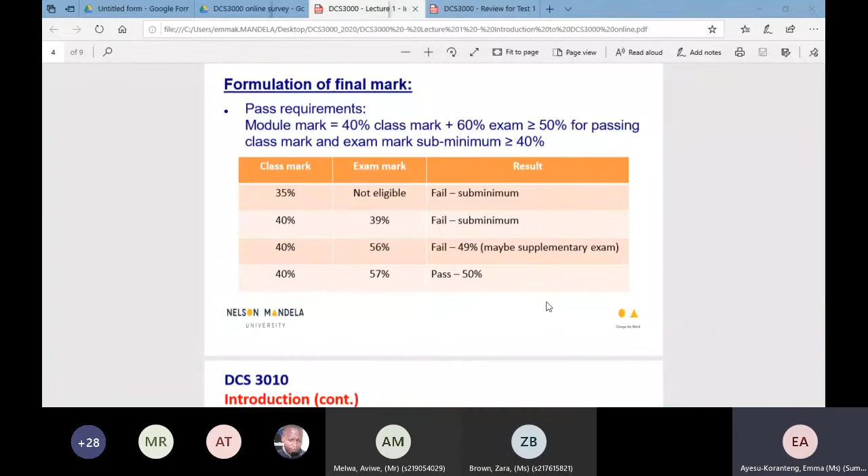Okay, great, awesome. So basically, if you're looking at the mark formulation, it's the same, nothing has changed. You need your 40% to get into the exam and so on and so forth. It's very much the same thing.

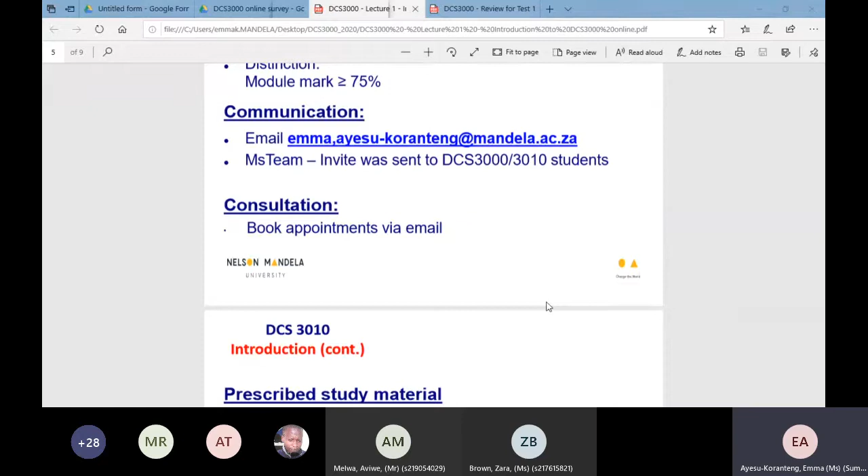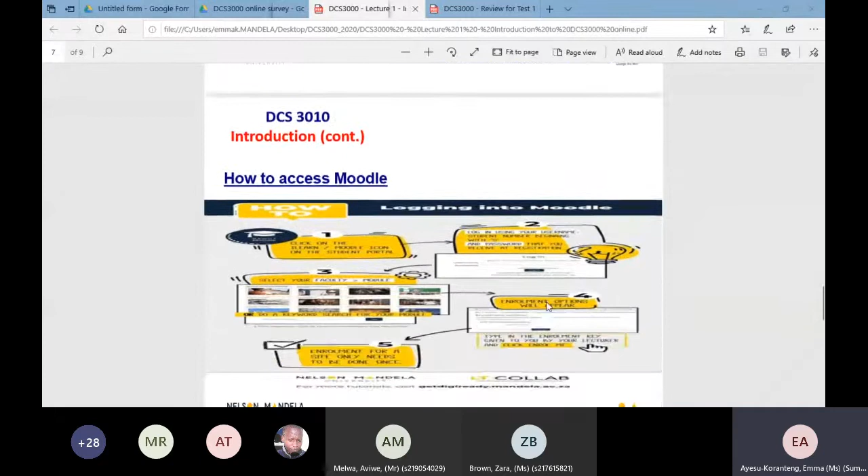You know the basic textbooks that we have, it's nothing for us to worry about, and by now you all know how to use Moodle. So basically, if we look at what we've covered thus far, we've done chapter 1, 2, 3, 4, 5, 6, 7, and 8.

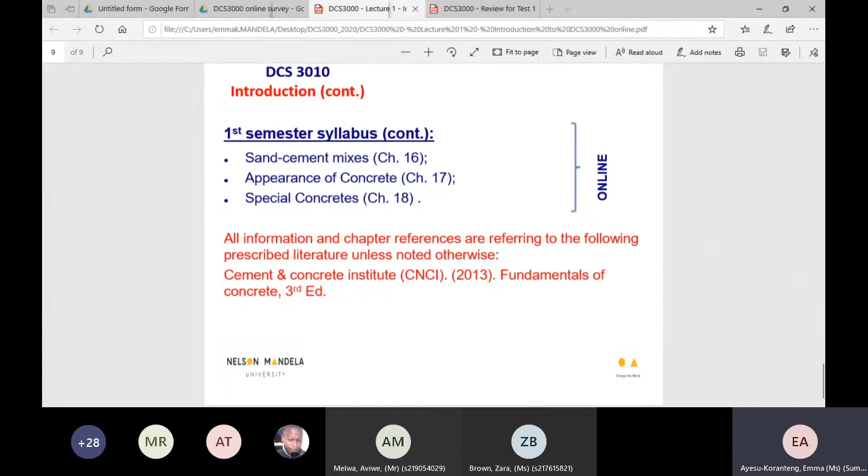Now, I do know, I mean, we've had a couple of weeks sitting at home. You were supposed to be going over your work. But as a student myself, I also know that I never do. So when I was studying and I had to do work on my own, or we were expected to read, I never did. So I'm assuming that most of you did not go over the work we did, and I hope I'm wrong.

But nonetheless, I just want us to review what we did before the lockdown. And also, it's vitally important, this is literally a summary of chapter 1 to 8. I know I received an email from a student that told me he left his textbook on campus or at the res or something. So that's why I put this together, to almost summarize chapter 1 to 8, to give you an idea of the most important points within those chapters that you're supposed to focus on. Even though this is not cast in stone, it does not absolve you, it doesn't stop you, it's not supposed to be a substitute for reading the textbook.

So you're still supposed to read the textbook irrespective, but this is just a summary of each chapter. Look at chapter 1. Chapter 1 is very much the basics, what is concrete. I think everybody is aware of that. We know that it's a mixture of cement, aggregates and the likes. And then of course, why concrete is used so much. So as we get along, these are the outcomes, these are the things you're supposed to know per chapter.

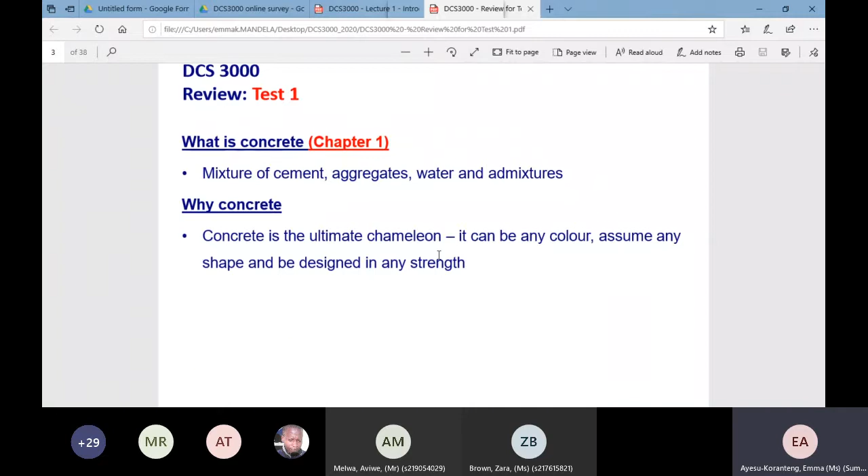All right, so if you have forgotten, or you don't remember, or you just want to recap, you can take your book and just highlight or make a note as we get along with this particular section. Okay, so that in a nutshell is actually chapter 1 in itself. It's very simple, understanding what concrete is and then why concrete is used extensively.

However, when you look at the reason why concrete is used extensively in your textbook, there are various reasons, but you don't necessarily have to know them all. But having a broad idea of the reason why concrete is one of the most used materials will suffice.

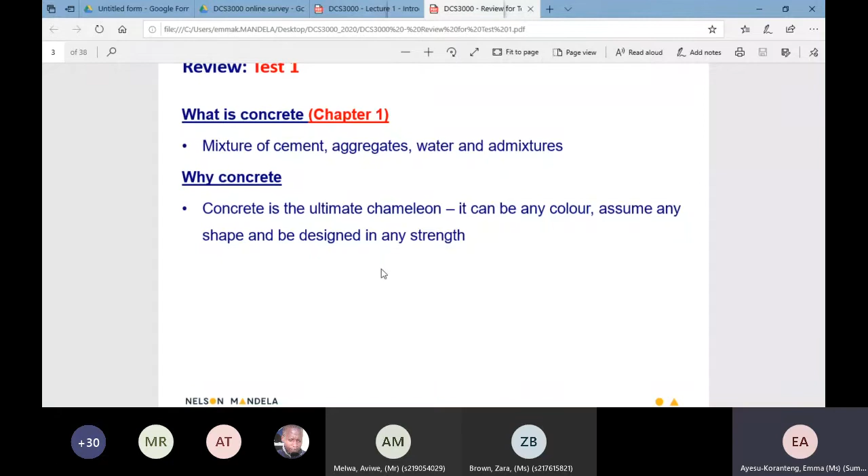So sometimes it's not everything that you need to memorize. Some of these things are things that you already know. Remember that normally in our lecture, I ask very practical questions, or I tend to get the guys that have worked on site, because concrete is very much site-based. It's like construction technology. Once you've seen it, once you've been on site, it's very easy to understand and it's very easy to apply. So it's very important that at all times, try and put yourself on site and try and see some of these things without necessarily having to spend so much time just memorizing things that you may not remember.

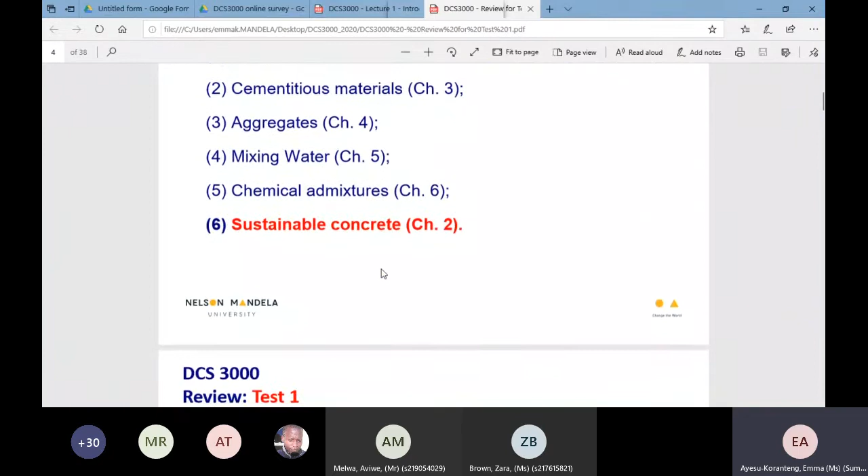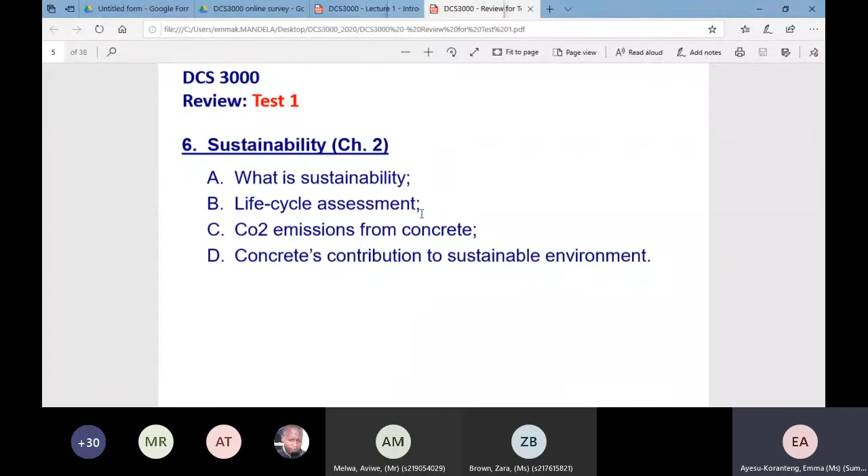All right, then the next chapter was chapter 2, which is sustainability, or the sustainability of concrete. Now, very important, when we deal with sustainability, you've got to be able to explain what sustainability is. I think I've highlighted that in the past as well. We're also supposed to look at the life cycle assessment, the carbon dioxide emissions of concrete, and then concrete's contribution to the environment, or to a sustainable environment.

We know that the carbon footprint of concrete, if you look at the entire world, is relatively very big. It's quite large. I mean, everywhere you go, it's just concrete structures and so on and so forth. But to what effect are all these concrete structures in relation to the environment?

So it's very important that even though concrete is used extensively, we've also got to understand that we've got to look at sustainability. We've got to give something back. Some of you have children. You've got to think about what are you going to leave for your children? What kind of world are you going to leave for your children?

I know everybody's talking about this coronavirus being a nightmare. Of course it is a nightmare, in the sense that there's no cure, there's no treatment, and so on. But I don't know if you've been watching the news. I don't even watch it because it's quite depressing.

But they've been actually showing that from the time of the lockdown until now, the difference in air quality, if you look at countries like India and China even, their air quality has improved so much. So there hasn't been much pollution. And I don't know, maybe sometimes I kind of think that this is Mother Nature trying to cure itself, or trying to get itself back because of all the misdeeds of human beings, or all our activities that is polluting the earth. So who knows?

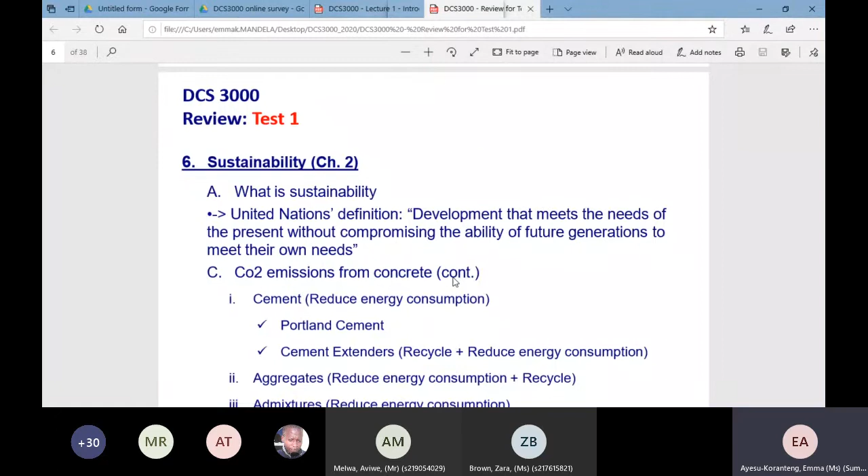But the construction industry is not exempted. We contribute significantly to global warming, significantly to pollution. And at a point, we've got to start thinking about what we're going to leave behind. Not for us—we are here now, look, 50, 60, 80 years if we're lucky, we'll still be around, God willing. But what happens to those that come after us?

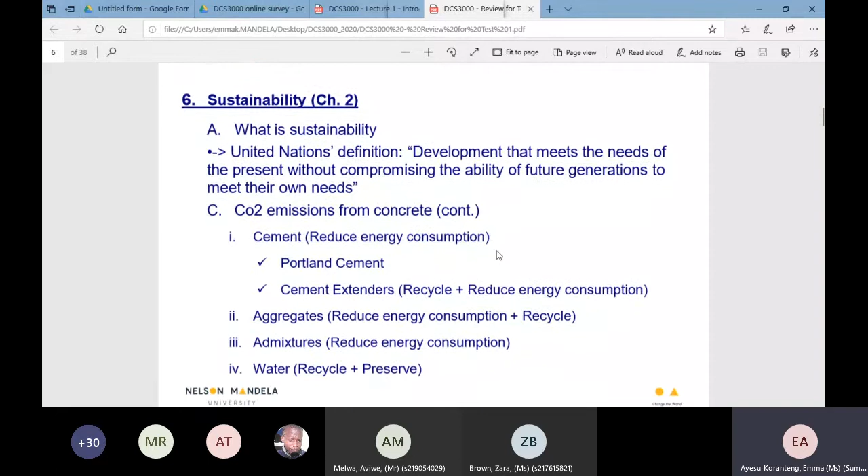So we've got to start thinking at least along that line. So when we look at sustainability, of course what you need to know is you need to be able to define it, in whatever definition there is. But of course we always look at the United Nations definition, which is fine. But whichever definition you decide to use, it's okay with you. It's not a problem, because the definitions will more or less be the same. The wordings may be slightly different.

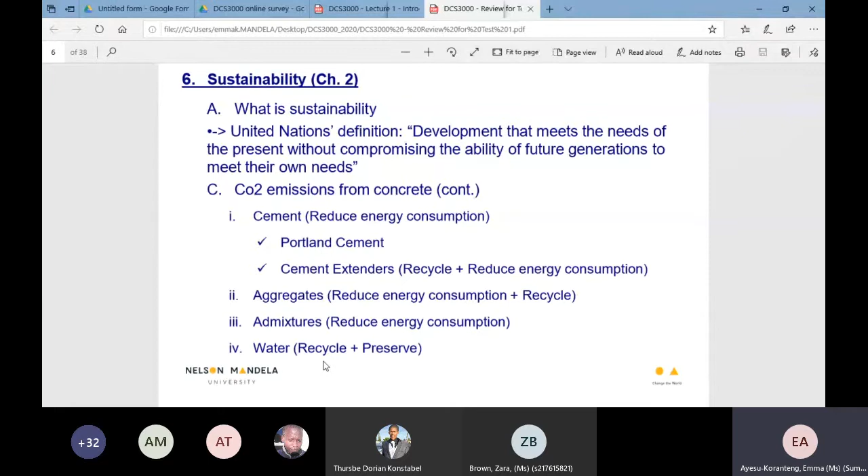And then admixtures, and then the last one is water. With water, you're all aware that we currently have a water crisis. We've got to survive, we need clean water to drink, but water for making concrete, if we don't have enough water to drink ourselves... remember that water for concrete should be the same quality as the water that you drink. If that's the case, then we've got to consider using recycled water, harvested water, etc., to have a positive impact on sustainability.

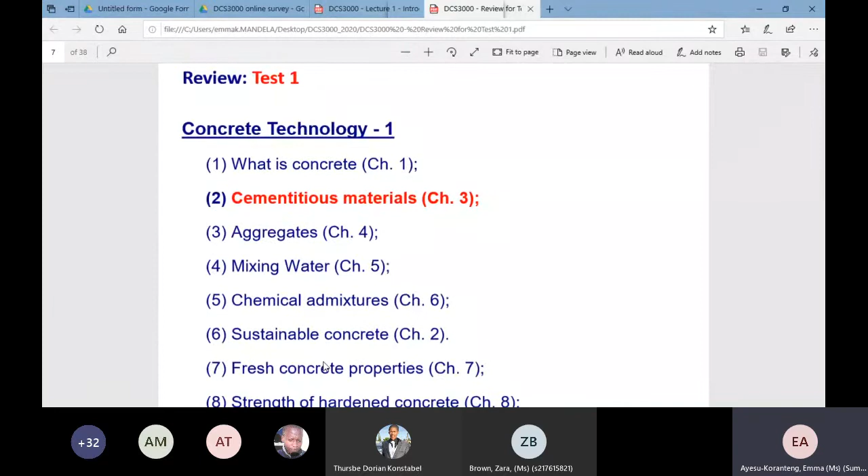Okay, let's proceed. So that covers chapter 2. We move over to chapter 3, which is cementitious materials.

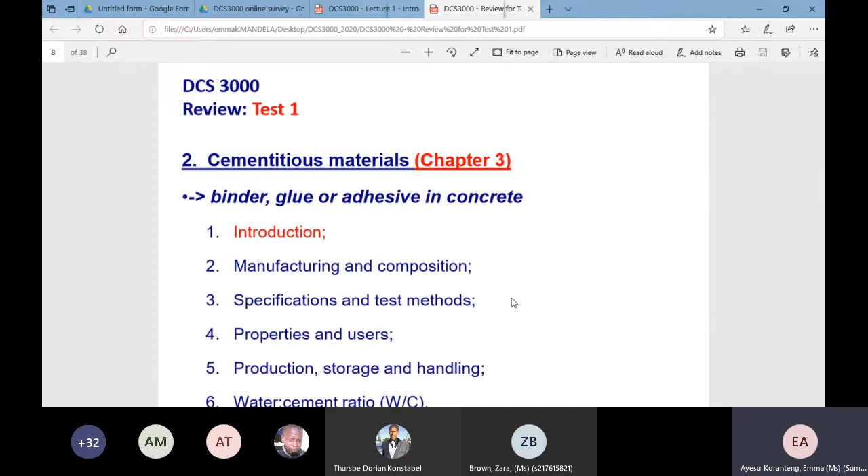Perfect. All right, so we're going to look at cementitious materials. You're all aware of cementitious materials - we're talking about Portland cement, we're talking about the cement extenders, the fly ashes, and all of that stuff.

We know that cementitious materials are the binding agent in all the ingredients. Without the cementitious materials, you have the various materials just as particles, just in a bowl or whatever. But with the cementitious material, it's the glue that binds them all together.

So imagine having sand, coarse aggregate, maybe an admixture, and even the cement itself. So you'd have all of these ingredients together, but they're not sticky, they don't stick together. Once you add the water, that's what kickstarts the hydration process, which makes that gluey, sticky paste.

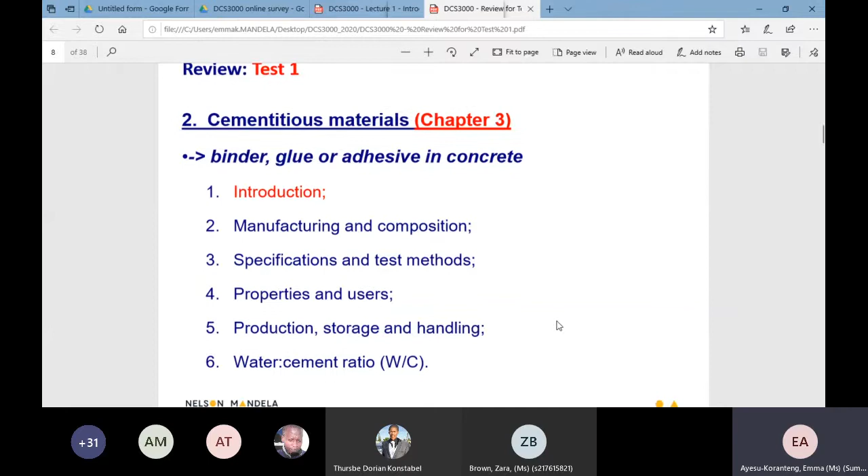Moving forward, we know that we have various cements - common cements, masonry cements, and cement extenders. Guys, you've got to be very careful that certain cements are used for certain things. So don't confuse this in a test.

I know that when it comes to multiple choice, sometimes it gets extremely confusing - you're all familiar with how Dr. Becker asks questions from his DCO first year. My multiple choice is structured like that, so it's very easy to get confused. But nonetheless, you need to be able to understand the specific cements and what they're used for.

You should also know just a few of them, not all of them - like we have the CEM I, CEM II, and so on up to V. We have masonry cements, and you need to have some sort of understanding with regards to the types of masonry cements. We know that some of them have admixture, cement extenders in them, and so on.

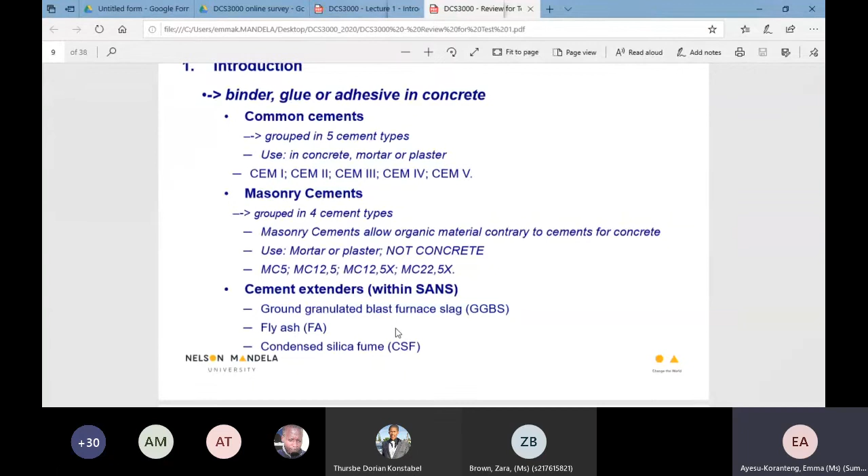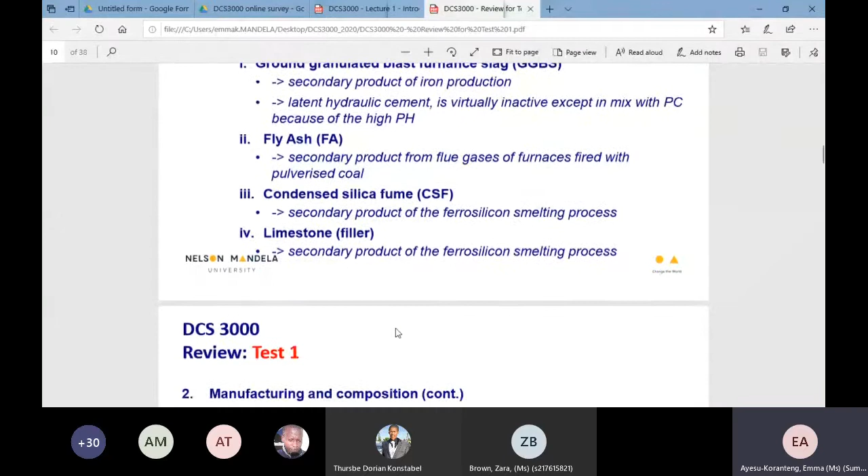And then of course having the extenders themselves, being able to differentiate between the GGBS, the fly ash, and the condensed silica fumes. I'm not going to go over all of this in detail - I've actually uploaded this document on Moodle for you. I just wanted to highlight what you need to know.

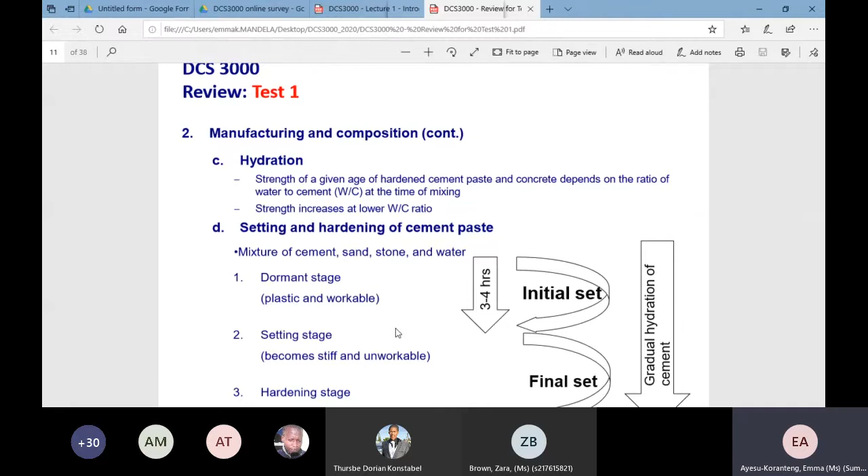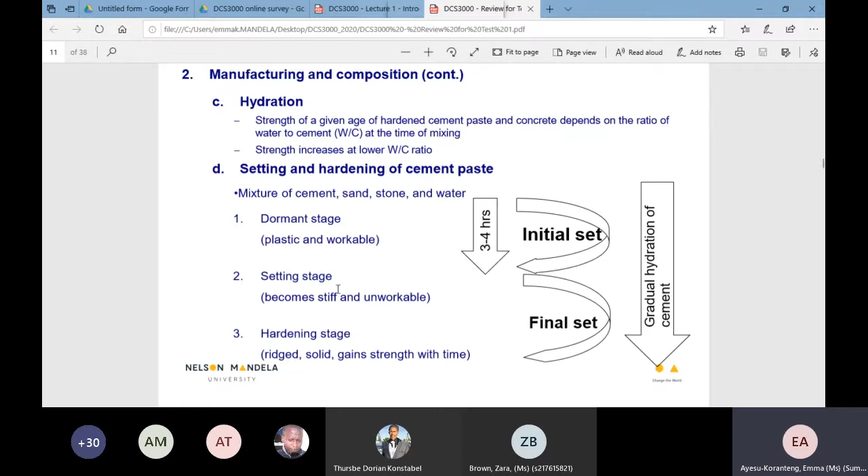So obviously hydration - understanding what that is, how concrete sets and how it hardens - this is something you all should know. Also being able to explain the dormant stage, the setting stage, and the hardening stage. Now, I'm not redoing the lecture, but I'm just giving you a brief overview of the various chapters that we've covered already. So all of this has been done previously - it's just a matter of touching base with what we've done.

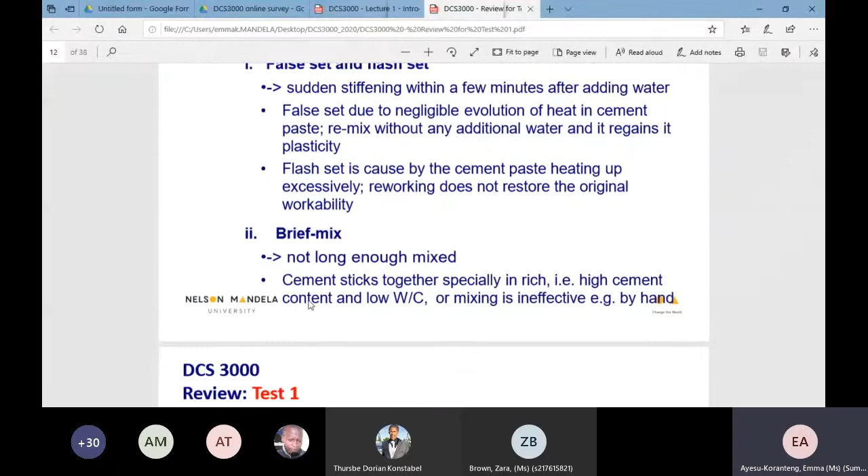Setting and hardening again - yes, please do note and don't forget the false set and the flash set, the brief mix, and very important, when you look at a false set and flash set and even a brief mix, you've got to be able to understand or explain or demonstrate whether, if you have a flash set or a false set, is there anything you can do about it? Can you improve it in any way?

That kind of thing. So having a broader understanding of these things is important.

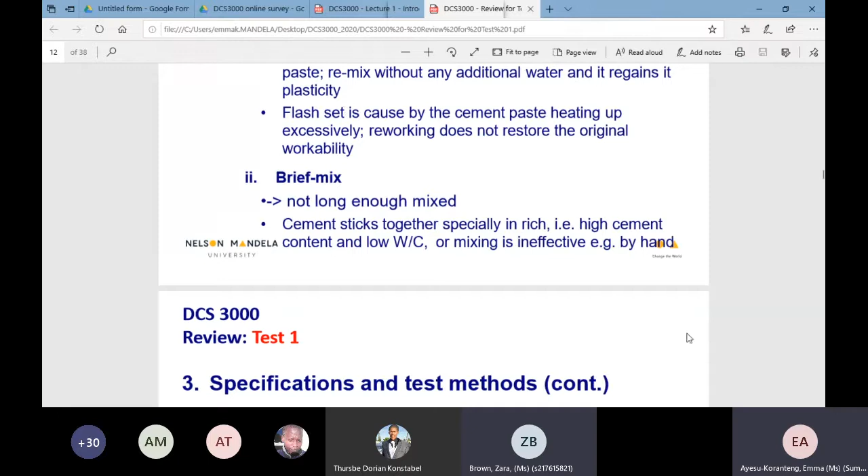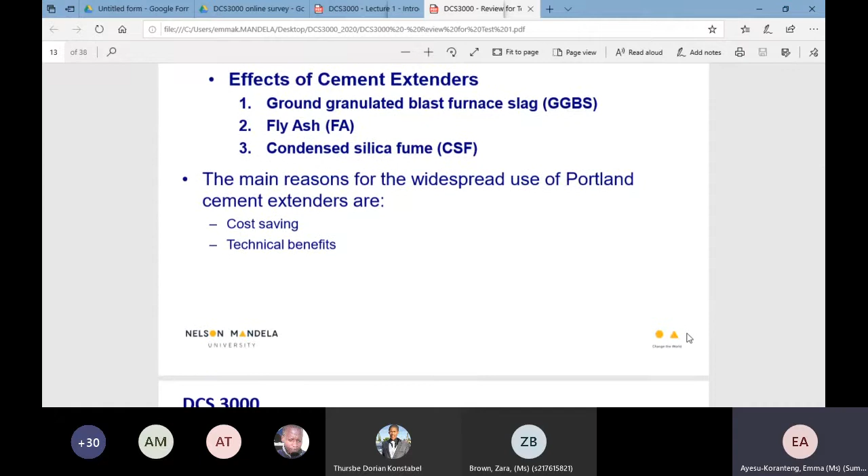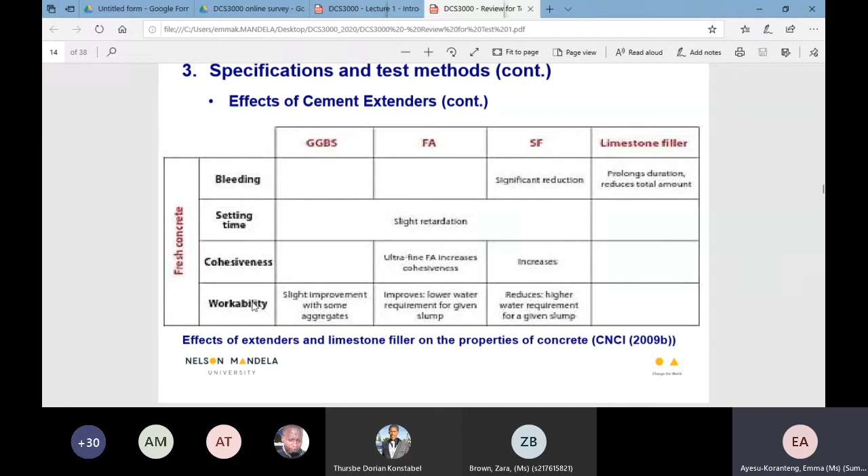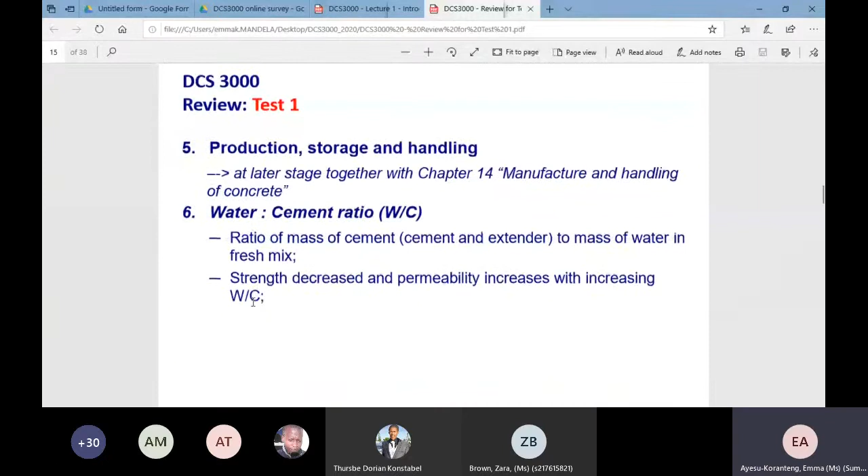When we get to specifications of the cement extenders, I don't know if you still remember this - I showed it to you in class some time back and you took photos. This is looking at the effects of cement extenders in fresh concrete, and the other one was in hardened concrete. We have bleeding, setting time, cohesiveness. I'm not going to go over it - this is for your benefit, you can go and have a look at it. But literally, the effects of cement extenders on fresh concrete is important. Remember, the other one is on hardened concrete, so you've got to have a look at that too.

Then, of course, the water cement ratio. We know that for a cement mix, if you look at the CNCI mixing method, there's actually recommended liters of water for specific quantities of concrete. But that is something we will look at when we get to the CNCI mixing method. For now, you need to be able to explain what a water cement ratio is, and that's about it.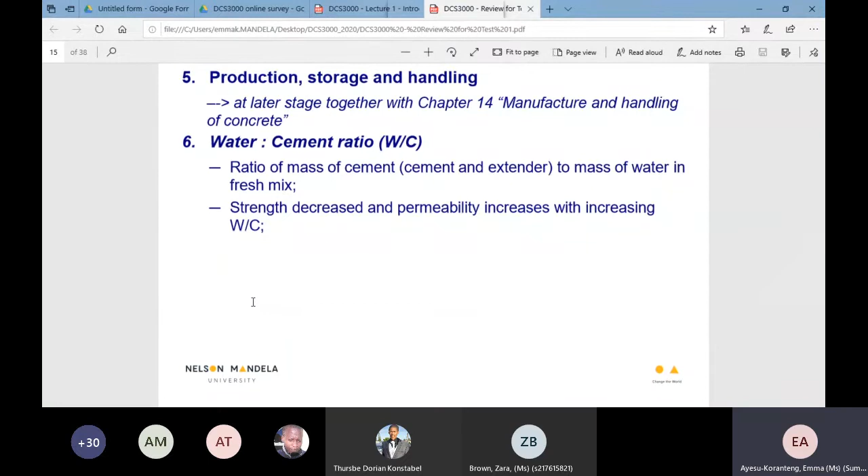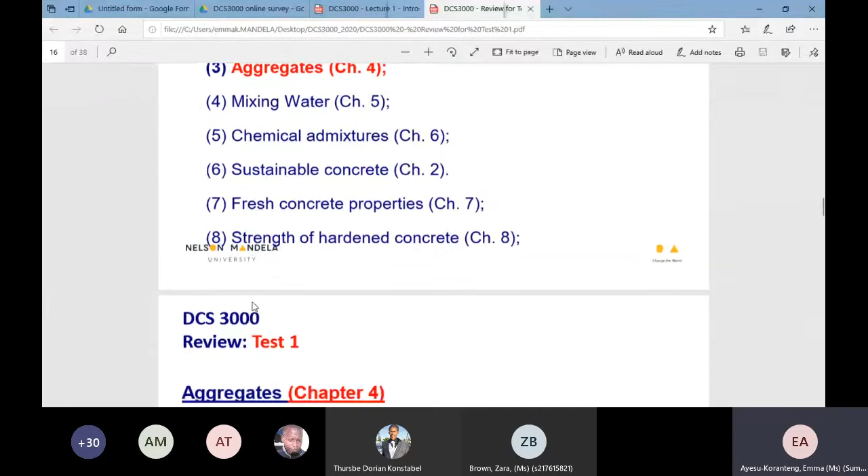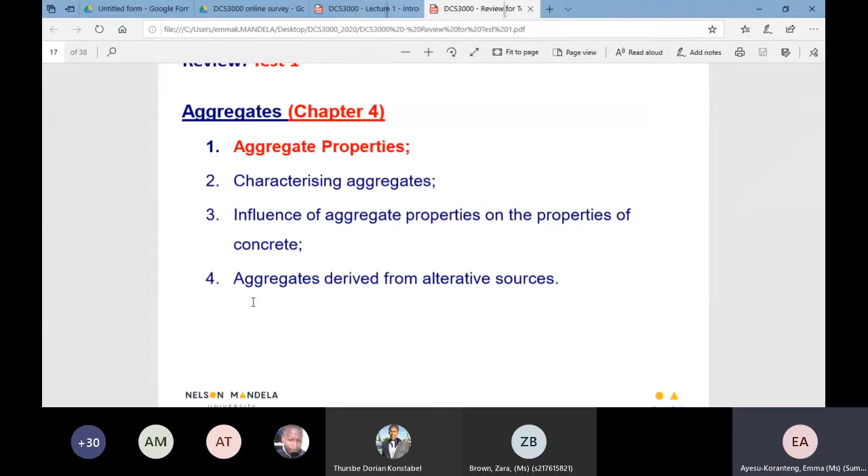All right, so then we move over to aggregates. I don't know if we'll finish all of this before the time, but nonetheless, let's go. Aggregates - we look at their properties, the characteristics, influence of aggregates on the properties of concrete, and then the sources of aggregates.

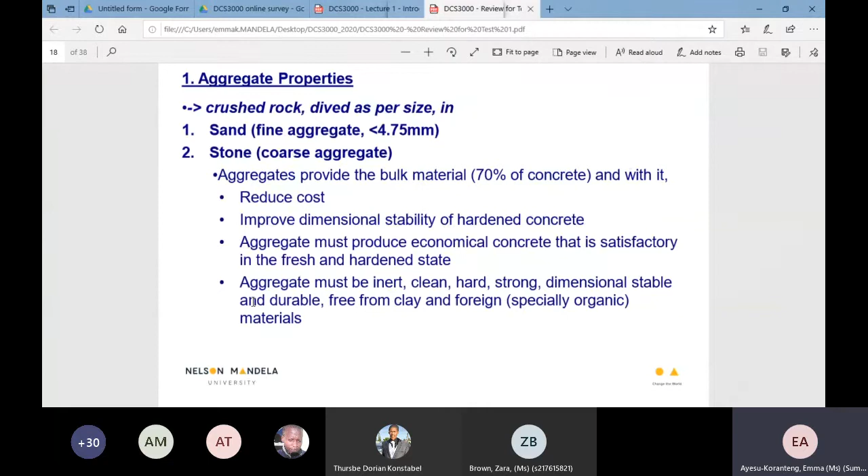We know that we have fine aggregate and coarse aggregate. Everybody knows that. We know that the aggregates are distinguished based on their sizes. When we look at fine aggregates, it's anything less than 4.75 millimeters. And if it's more than that, then it is coarser - it obviously becomes a stone.

Now, aggregates make up a good percentage of the concrete mix. As such, making concrete has to be economical - you cannot use more of one material than another. You can't use more cement than needed, you'll be wasting money. So it's got to be in proportion based on the mix design, and it's got to make economic sense. If the engineer has specified a 20 MPa concrete, it does not make sense for you to produce a 40 MPa concrete. You'll be giving a concrete that is way over specified, but at the end of the day, is it economical as a contractor? You'll be wasting money and nobody's going to pay you for that.

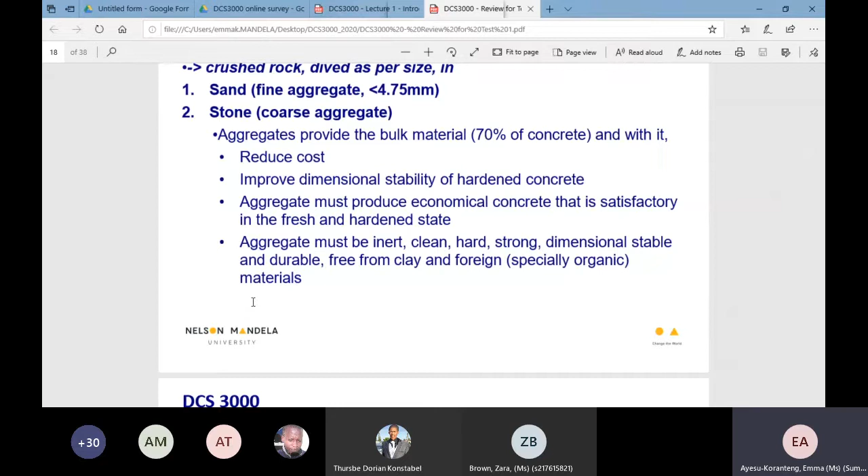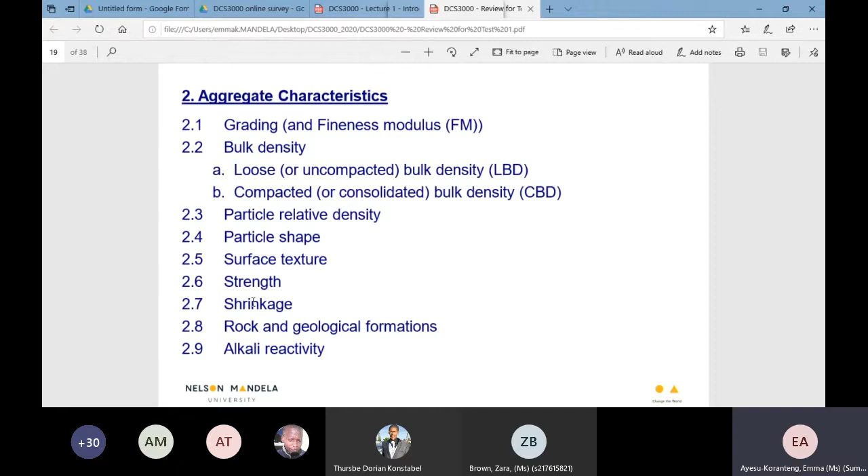All right, so if you look at aggregate characteristics, now this is where it gets interesting. We have these characteristics: grading, bulk density, particle shape, and so on. All of this you have to know. You cannot select a few and focus on just those, or take the ones you can remember. Unfortunately, ladies and gentlemen, you have to know them all.

Okay, now I just wanted to bring to your attention that for test 1, I will not include the fineness modulus calculation. Let me repeat that - for test 1, I will not include the fineness modulus calculation. However, for test 2, because we're going to do the C&CI mix method, it includes sieve analysis. We'll do sieve analysis there, in chapter 12 or 13, I'm not too sure, but we'll do it when we do the concrete mixes because we'll make reference to the sieve analysis. Because of this, there's no point doing sieve analysis for test 1 when it will actually be in test 2. And in test 2 it makes sense because you use the analysis to continue with the calculation for your C&CI mix method. Is that okay?

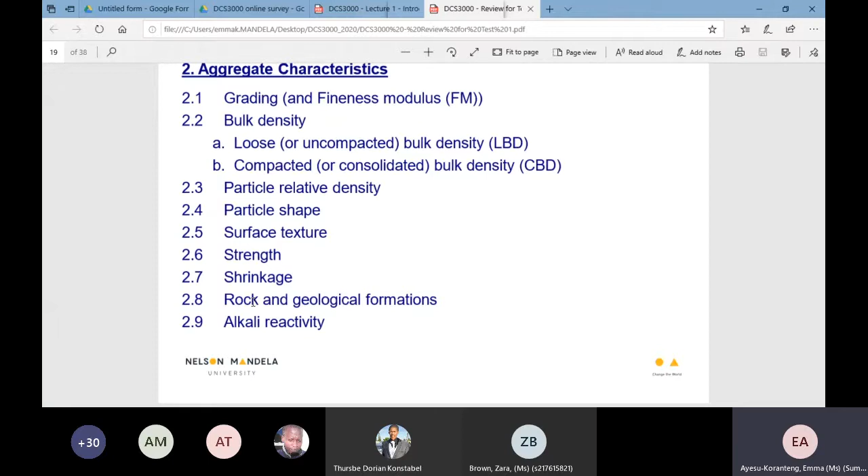I tend to sometimes forget these things and put stuff into the test when I say it's not in.

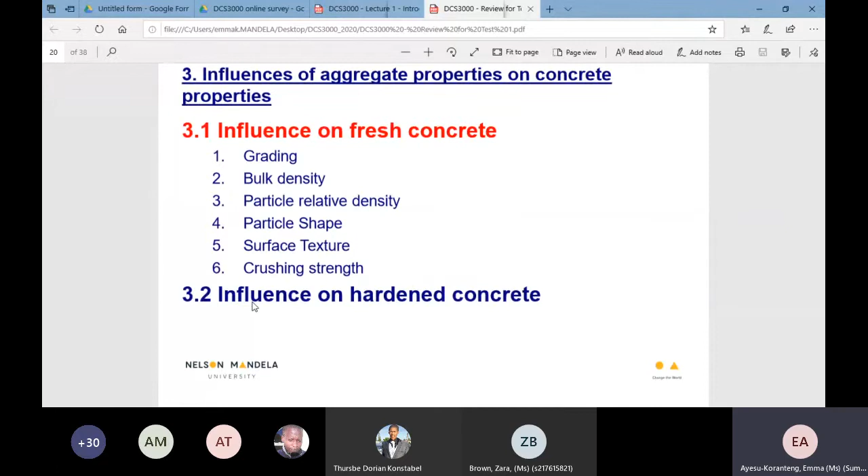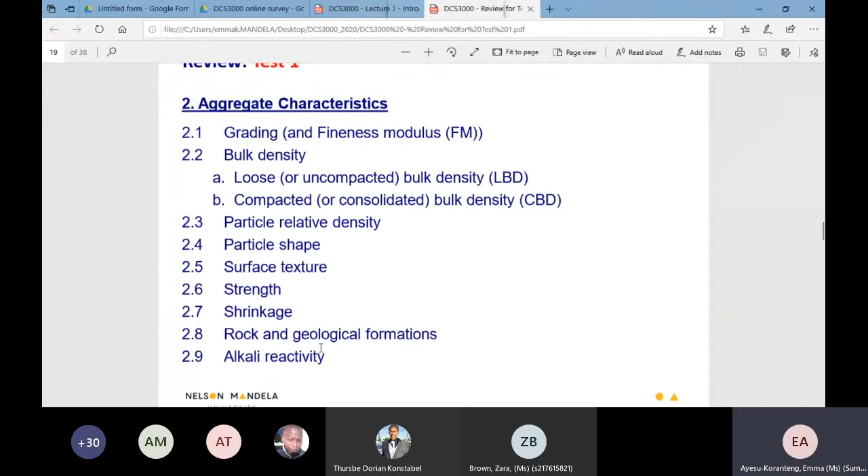Looking at the aggregate characteristics, guys, all of these you've got to know. But also we've got to know the influence of aggregates on fresh concrete and the influence of aggregates on hardened concrete. They are two distinctive influences, so you've got to be able to distinguish between the two. They're vitally important.

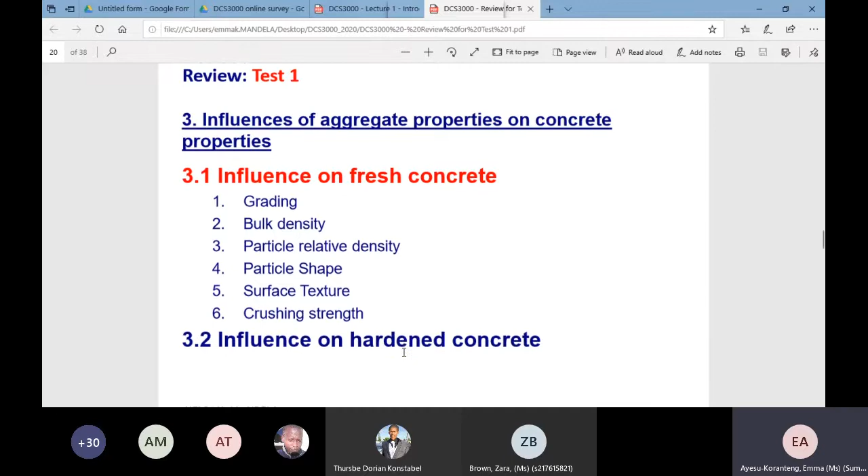I'm not going to go through all of that. Let's look at mixing water. Mixing water is as simple as that: the water's got to be clean, and it's got to be the same quality as potable drinking water.

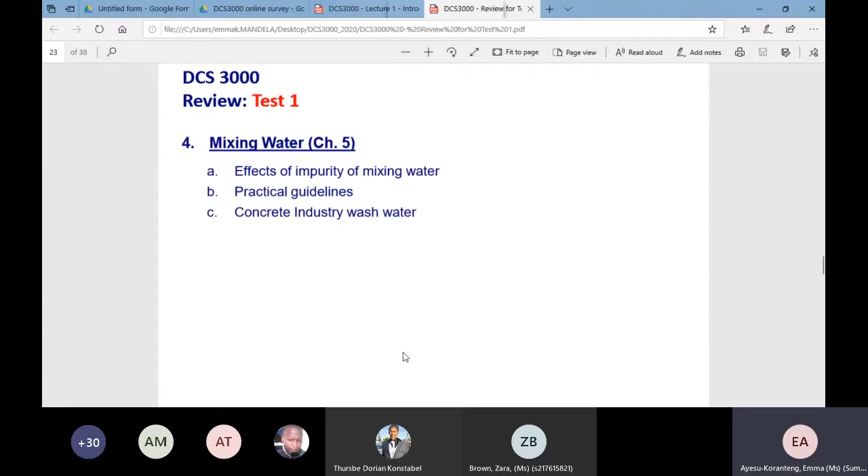There are various guidelines with regards to harvested water or recycled water and things like that, and then of course an understanding of industry wash water. I think one of the guys on site mentioned that normally when a concrete truck arrives on site and discharges its concrete, they wash out the truck with a bit of water. That water can also be used for mixing concrete, which is fine.

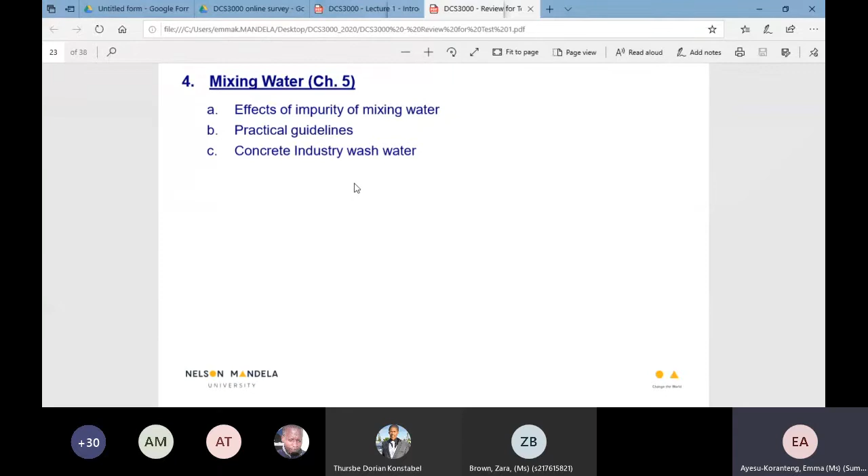I know that in certain areas of the country now, where there's a drought situation, water is a problem - Butterworth, the Karoo, and so on. So mixing water for concrete has become almost like a new gold. To get water now is more expensive, yet previously it wasn't the case.

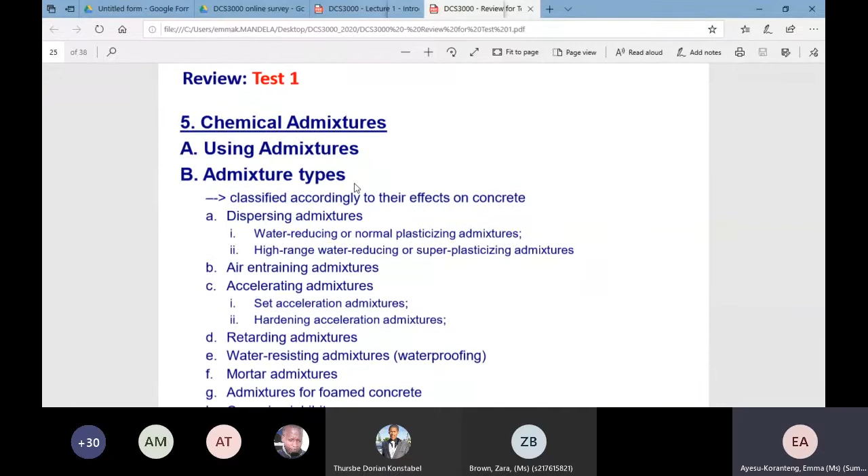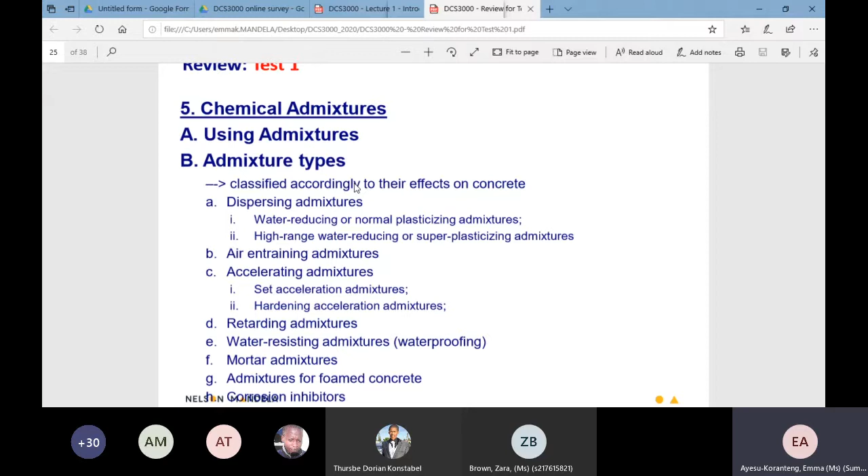All right, chemical admixtures is the next one. With chemical admixtures, we know that the name of the admixture tells you what it does. So don't forget that - if you have a dispersing admixture, a retarding admixture, or an accelerating admixture, the name should give you an idea of what it is. These are things you don't have to memorize and break your head over, just understand it. Remembering that the name is what the admixture does should suffice and shouldn't be much of a problem.

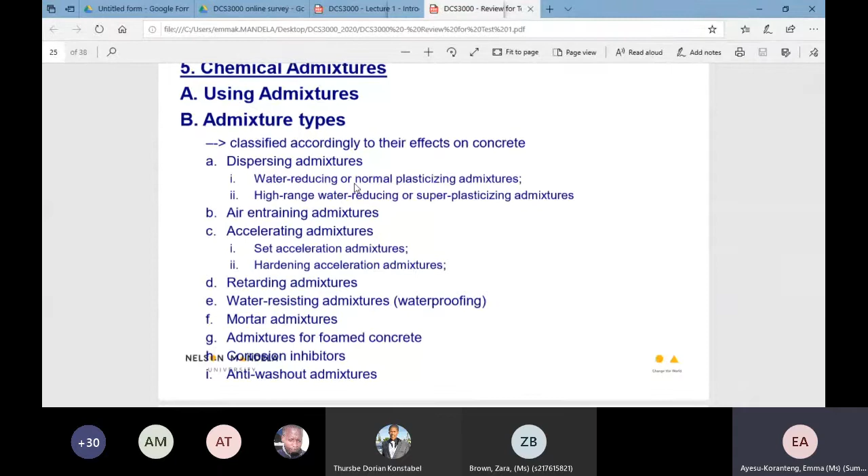So you should actually know and understand the uses of admixtures - why we use them, what we use them for - and then the types of admixtures. If you know the name of the admixture, you're obviously going to know what it's used for. So here you've just got to have a good understanding of the various admixtures.

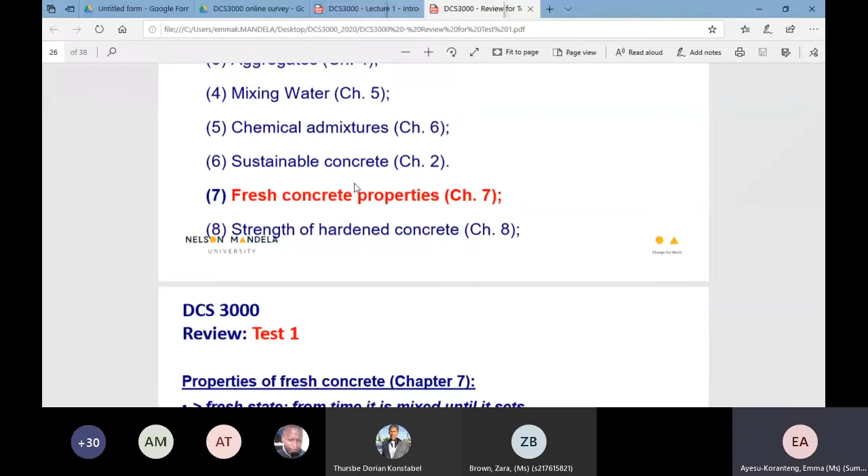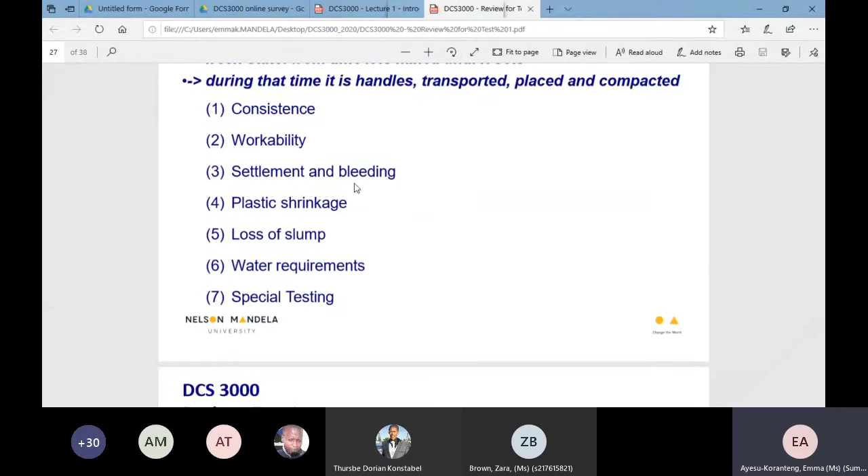Properties, chapter 7. Now when it comes to this chapter, we looked at consistency, workability, settlement and bleeding, plastic shrinkage, loss of slump, water requirements, and then special tests.

Now when it comes to consistency, you've got to be able to explain what consistency is, and then of course the slump test. Now the slump test in the concrete technology textbook we're using is okay - it's quite detailed, and the procedure is easy to follow. So that's the kind of slump test I want you to follow. It's very similar to the one in How to Build, if I'm not mistaken it should be the same thing.

So such a question, if it's a written question, is about 15 marks or so. But even in a multiple choice situation, you've got to be able to pick out the various steps from a dozen options. Hypothetically, if I gave you 30 different options under slump test, you've got to be able to pick out which step comes first, second, third, and so on until the end. Or you've got to be able to pick out which option is specific to a slump test or specific to a cube test, that kind of thing. So you've got to be able to understand the slump test.

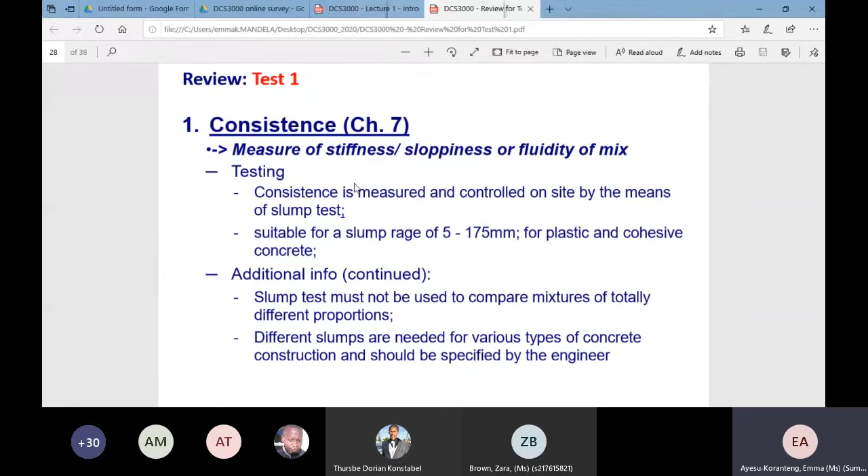Again, I'm trying not to spoon feed too much or to give you too much. So some of these things, don't wait for me - if you can, go online, get a video, find a video. If you're not sure, you can just email me a link, let me check it out, and if it's good enough then we can share it with everybody. So nothing stops you from taking the initiative. I mean, we're third years now - it's the first years that need spoon feeding.

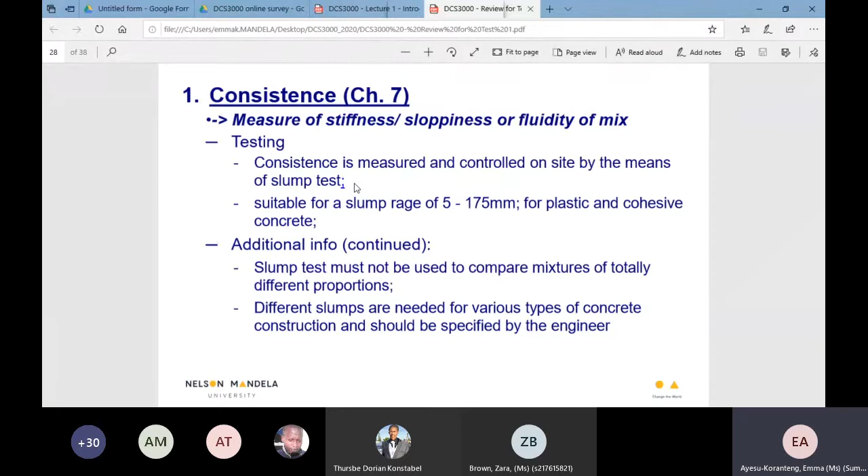Even under normal circumstances I shouldn't be doing this test review, because as senior students you kind of captain your own ship. But this health situation is nobody's fault, and as such I just want to try and make the transition from normal classes to online as smooth as possible.

Workability. All right, so you guys will read through this yourself.

Settlement and bleeding. Guys, when we got to this point in our lecture, we looked very much at settlement. We looked very much at bleeding. We looked at what bleed water is.

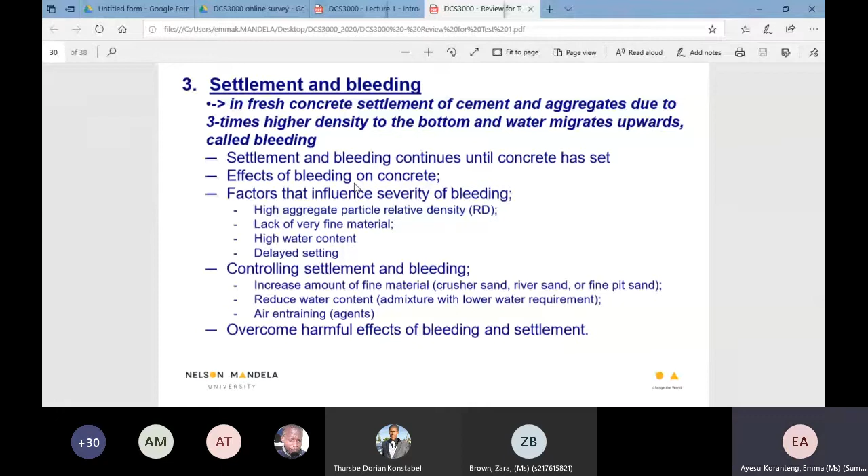I can actually see the students that contributed during that lecture. I can see them now, but I just can't remember their names.

Plastic shrinkage as well. So for those of you that don't have the textbook, at least you're going to have these slides. But like I said, it's not enough. I did find out if I could scan the document through. Unfortunately not.

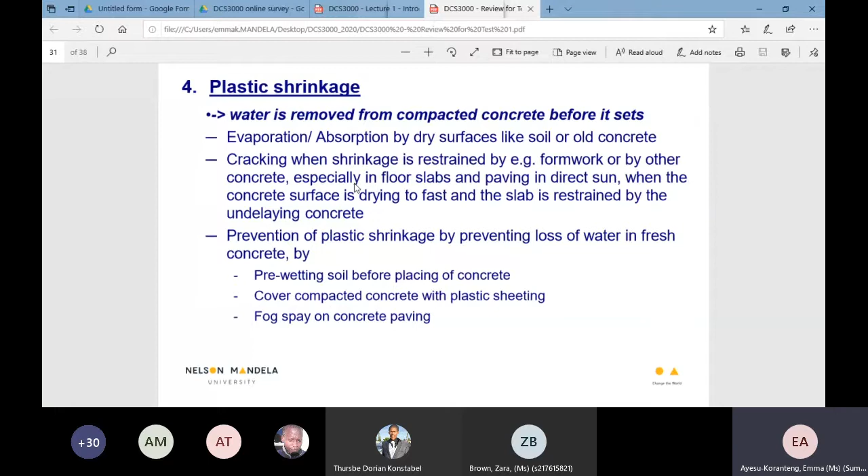Students, you guys can work something out, sending pictures and whatever, but as a lecturer I cannot do it because we're bound by certain policies and so on.

All right, you should be able to explain what a slump loss is. And of course, if you have a situation of a slump loss, what you can do and what you cannot do. I mean, I think some people just add water.

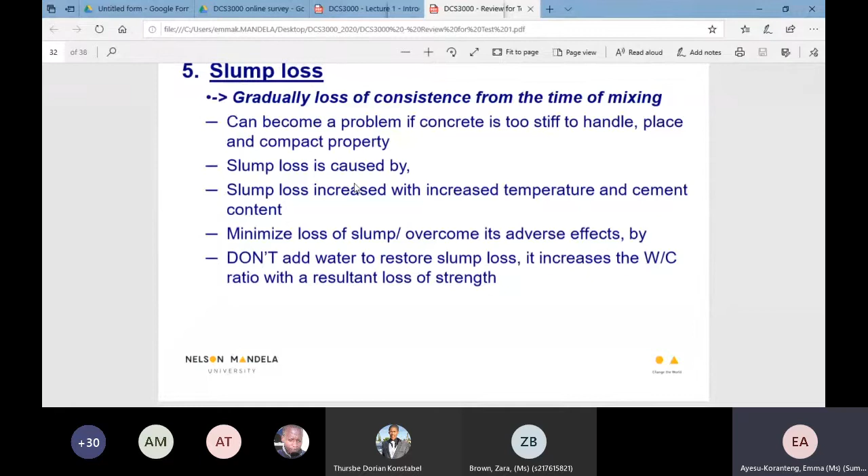Water is an ingredient in concrete, but sometimes it's so abused, put in excess. And then, of course, if you use more water than necessary, the water cement ratio is affected, the strength is affected. If you use less water, your workability is a problem because it becomes too hard or too stiff. You can't work it, and on it goes, or it becomes too harsh.

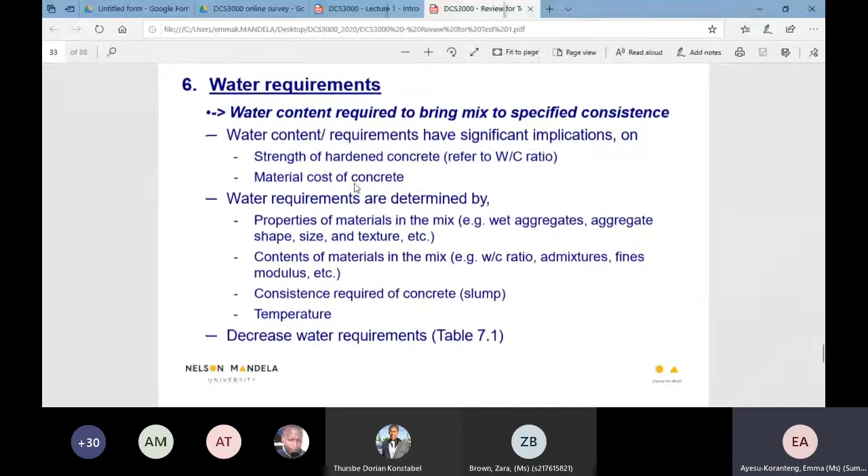So yeah, you should be able to explain slump loss. Water requirement you can go through yourself, and then the test.

Now, when it comes to this test, I think during the lecture, if I remember correctly, I sent you videos of a Vebe test or flow test. Either I sent you the links or we watched it in the lecture. I think we watched it and I still sent you the link.

All right, guys, you should be able to describe the procedure in conducting a Vebe test or flow test, a slump test or a cube test with the apparatus that are used. So you cannot start writing a story as if you are in a play. It's got to be procedural, right? And then, of course, without the apparatus, then how does a person conduct the test?

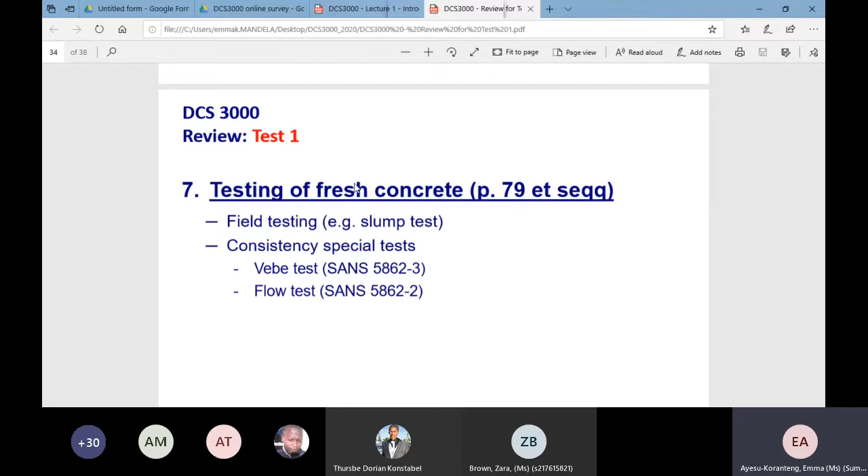So in a test situation, or whatever the case is, you must always try and answer questions as if I don't know what you're talking about. Yes, I'm your lecturer and I know it, it's fine, but you must write your answers as if you are teaching me. So when I read it, I should be able to conduct this test myself. So if you use that as a guideline, you shouldn't go wrong.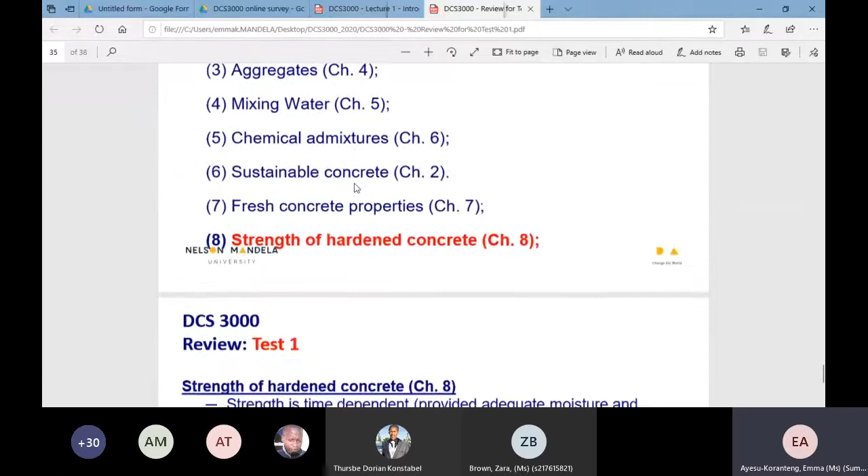Okay, let's go over. I think we're going to be doing the last one, which is strength of hardened concrete. And with this one, this is actually where we finished this chapter and then we had this lockdown situation.

But anyway, when we look at strength of hardened concrete, we look at time, we look at the compressive strength as well, the tensile strength. We looked at factors that influence strength of concrete. What you need not to forget, ladies and gentlemen, is the intrinsic and extrinsic factors. Those factors are so confusing that you can actually mix them around.

Okay, so bear in mind that if we're going to deal with strength of hardened concrete, firstly we deal with the cube test. Now, the cube test ideally is, we have our SANS code for the cube test, but you have certain occasions where the cube test is not enough and then you need something else, a core test.

You should be able to, and I explained it so I'm not going to explain it again, but I want you to actually go do the homework, to go and find out if you don't remember. So under which circumstances do we do a core test? And if so, then what do we do with the tests of the cube and of course with the test of the core? Which one supersedes the other and so on and so forth? So you've got to be able to have such understanding.